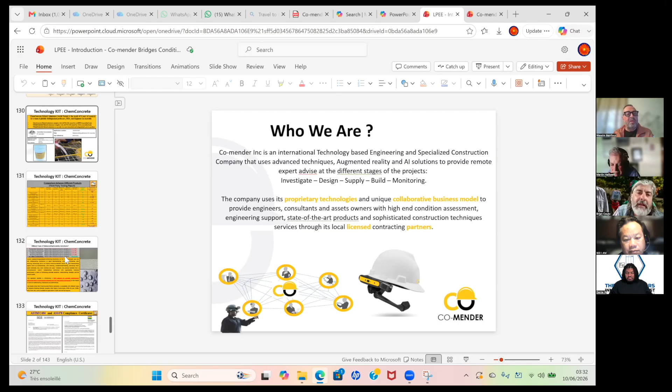You'll have a live screen and you'll see whatever they want to upload as well, correct? Exactly. So it's like having a little computer screen right there in front of you. Amazing. This is exactly the summary of it.

So the expert is sitting at his desk, seeing what the engineer is seeing and what the engineer is doing. And the engineer, when he looks here, he can see a projected view of this screen. So he can get instructions, he can get an inspection checklist, he can get everything with his hands free, because it's very critical and unsafe to use something like this at site while you're working.

It's a construction safety issue. So that's why, to be honest, the technology still has to be enhanced. It's not designed perfectly for the construction site. Now what we are trying to do is develop our own solution for construction.

Till now, we are still using solutions and technologies developed for other industries, but we are working to make this more construction friendly, to implement our solution the right way. You want to make it more rugged, so it could take dust, water, a fall. Right now it's sensitive, but it's more like it's good for inspection. Now it's good for going to site, inspecting an element, taking photos, explaining to the expert, putting notes on the photo, exchanging with the expert. It's a good option.

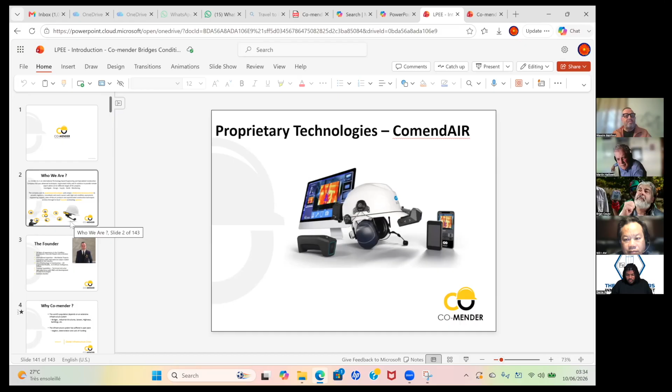Yeah, we have— for example, my boss, he's running 6 companies and 400 employees, and he likes to have the final say for everything. So he's got to drive from Mississauga to Niagara Falls to okay stuff sometimes. He's got to actually go there, see it, explain what he wants, because he's still old school. If he had something like this, he could tell the foreman, 'Hey, put on the video camera for a second, let me see what's going on.' Then he could work at the same time with his hands and fix, say, a plumbing problem or a wiring issue.

A wiring issue would be really good. If an actual electrician is looking at something, he can tell you right away, 'Hey, turn this off or turn that switch off,' or something, right? So, Brian, it's perfect for maintenance, exactly the way you describe. It's an excellent tool for maintenance, for example, equipment like HVAC in the building, problems with the electrical system.

But for concrete construction, we still have to do some development to better accommodate our requirements. Yes, 100%. Make something a little more rugged, maybe a cheaper model, something more cost effective that we could use and send around, you could have multiple in a company. Yes, they would all work on a network.

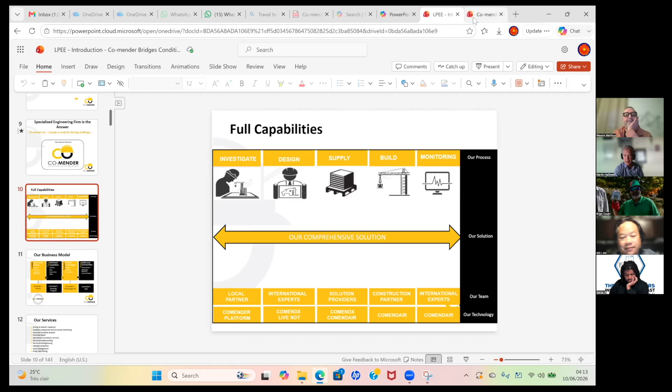Now, the shotcrete mix in Toronto, I think incorrectly, is 450 kilograms per cubic meter of cement, and I think you can drop that to probably less than maybe 350 with ChemConcrete. What do you think, we should try to figure that out. I think we've used 350 before in certain places, and then upped the slag and the fly ash in the mixes. So that mix design could be with ChemConcrete now. And that mix would be valuable, Wassim, to even work on for your projects, in terms of if we could come up with a mix now with William.

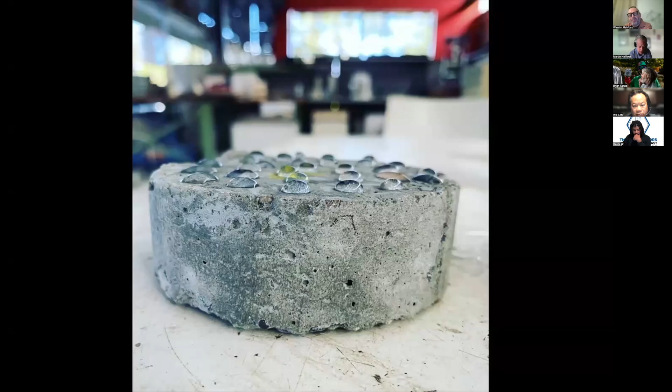This is your detail, I'll let you talk. I did send a couple of pictures to Dante too, but I only have the one picture of the beading. Okay, well show that, for the purposes of the audience we might as well show that. I also sent you, I thought maybe I haven't pressed send yet. I sent you a FEH2O lock detail with anchors. Can you see what I'm showing? There's the beading, you've seen this picture before, Wassim. So this is Sam's picture, I think, we talked about it on my podcast.

So for the benefit of anybody who watches this, this is ChemConcrete and the unique properties that make it dense. I don't see it, I don't see it, I don't know if the others are seeing it but I don't see it. Oh interesting, you don't, I have to stop sharing, I think I have to stop sharing. Oh yes, myself, yes okay, yes so now I see. So you see that, okay.

So then back to Wassim. Thanks, Dante. Okay, so I'm going to share with you guys again a little bit more about what we are trying to achieve with our waterproofing solution. With shotcrete? Yes, including shotcrete, I mean this is what we used to do.

Normally in the Middle East, they pour blinding concrete, install the membrane, a protection layer, and then another concrete layer of protection, 4 centimeters or 5 centimeters of protection. They have protection board on top of the membrane. This is for the horizontal part below the raft foundation.

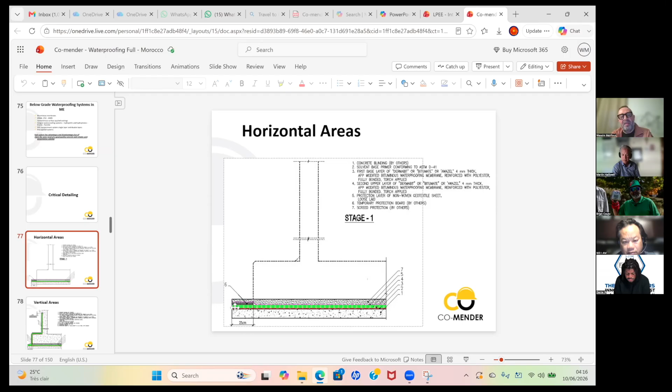And then what they do, they remove this part, they break this concrete, the 5 centimeter here, and they take overlap from the membrane, and they go up with the membrane like this to fix it above the ground level by 15 centimeter with a mechanical fixation on top.

How thick is the membrane? Membrane here, for example, this system, this is a detail. Certainly all the membranes have the same detail, but this one specifically was for double layer of bituminous membrane, 4 millimeter and 4 millimeter, so 8 millimeter plus protection board of another 2.5 millimeter. So bituminous, you mean liquid? No, not liquid, roll. It's torch applied. Okay, so this is only an example of the way we are installing it.

The envelope is created around the building. This membrane can be PVC, can be EPDM, can be any type of membrane. But this is only to show you the details, how we are installing the membrane and how we are creating an envelope around the basement if the basement is completely in the water. So it has to be like a full tanking system, enveloping everything horizontal, vertical, and going above the soil level by 15 centimeter with mechanical fixation to prevent water infiltrating between the membrane and the concrete.

But is that a dewatered condition when you put the membrane? Yes. Like it's got a secant pile wall? Yes. Sometimes we have open cut or closed cut. When we have open cut, we have access to work from outside. When we don't have open cut, we have secant pile, or we have a blind-sided waterproofing membrane. We install the membrane to the wall, and then we pour the concrete against the membrane.

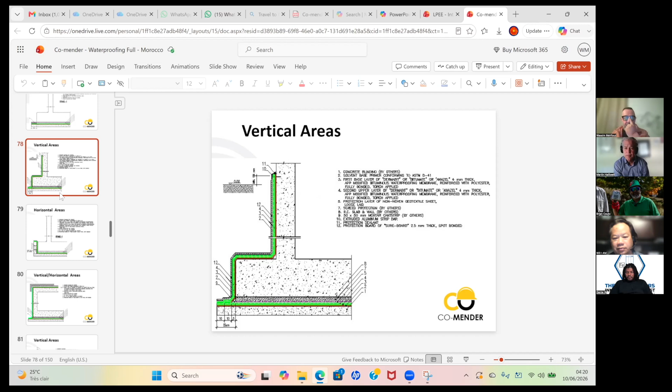So these are some details, guys, for the waterproofing, how they install the waterproofing. So they are kind of creating a full envelope.

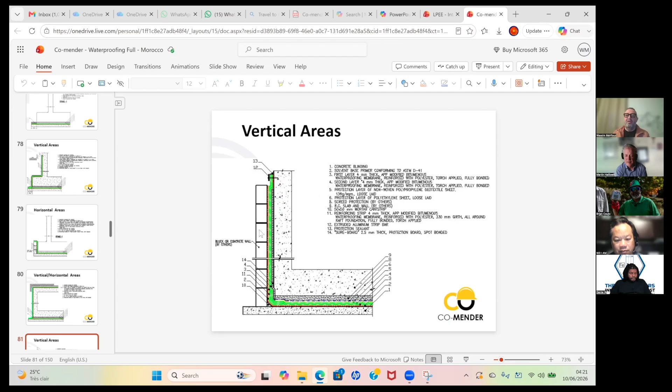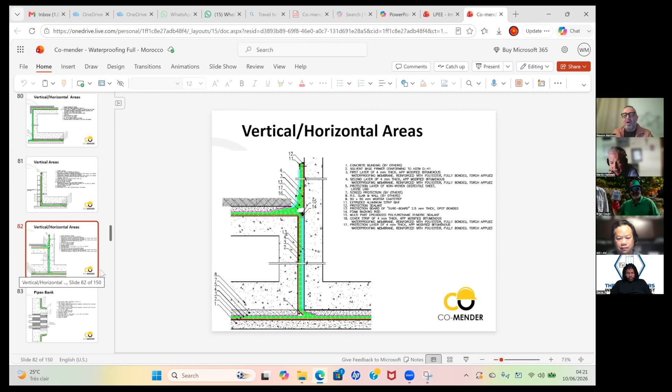This is what we say when we say blind-sided, Martin. Sometimes there is no secant pile, for example there is only a block wall, and they pour the concrete against the block wall only if there is no need, if they don't have a pressure, for example, or soil pressure. If they're above grade, are they also doing it? Typically all of these are below grade. All these are below grade, but not always high water table.

Sometimes it's only 2 meters, for example. Sometimes it's 4 meters. Sometimes it's a 10-meter water table, depending on the job site.

Relatively flat grade, would you say? Yes. Saudi Arabia is a desert, does it have mounds or hills 10 feet higher? Do people build in the dry there? Is there any dry area to build? Yes, sometimes, for example, in the Riyadh area it's a dry area, but they have some gaps in the soil filled with rainwater, and when they excavate they find underground perched water. Perched, yes, exactly, something like this. But in some locations it's 100% dry, yes.

But they do the waterproofing in this case against rainwater, because when it rains, it rains cats and dogs - a lot of water. It rains maybe 2 times a year, but it's really heavy rain, enough to test the waterproofing.

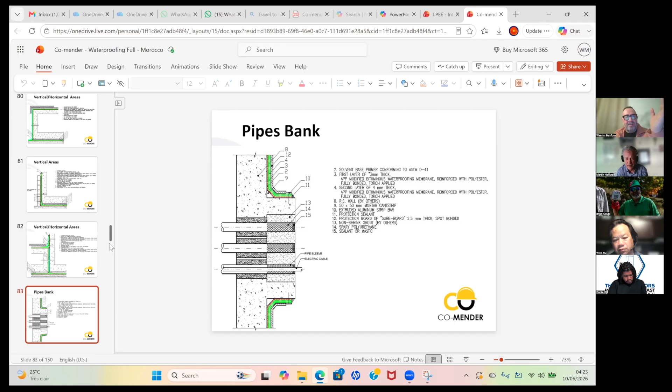Exactly, if you'd like our support on that, CH Shotcrete would definitely help out, William. In terms of William, would you wear the helmet? I wouldn't wear the helmet. But I might wear the helmet. Maybe we could both have helmets. Could I have a helmet too? I think Brian, you want a helmet too, right? Brian, where are you? Brian, you're quiet.

Imagine also this detail, Martin. Sometimes you build the raft on top of piles, a lot of piles, right? And then it's like a sieve. You have to do a treatment around every single pile with the membrane, so the membrane becomes like a sieve. These piles are probably 3 or 4 meters away from each other, and imagine an area of 5,000 square meters with all these piles and treatments. Do you think the membrane will keep water out in this location? For sure not. But imagine if you have ChemConcrete inside the concrete here - not necessarily full thickness - even treated with ChemConcrete only like this, then water will not go through.

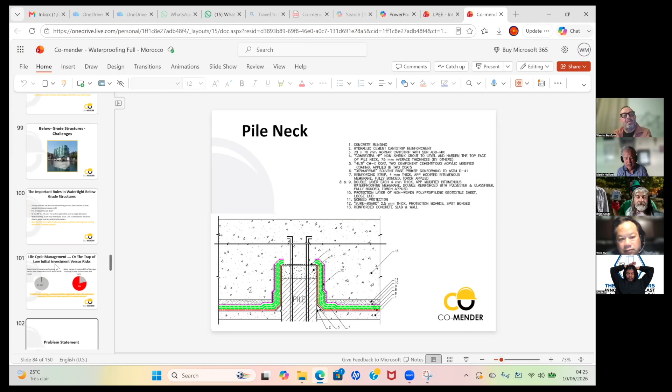But practically, with Wassim, you would spec the whole thing with ChemConcrete, right? There would be no point saying 'let's use the cheaper concrete' - it's not even necessarily more money. So yes, I think the direction we're headed is trying to get help from William and you to improve the leakage implications, right?

So this job was in Jeddah, Lamar Tower, one of the iconic buildings in the city. Look at the condition of the basement after they shut down the dewatering system - the whole basement was full of water infiltration. They kept treating this basement for almost 5 years after completion to stop the water, and they failed. A lot of issues now with durability, a lot of issues with corrosion. Now they are installing a full impressed cathodic protection system for the basement to protect the reinforcing bars. This is another job.

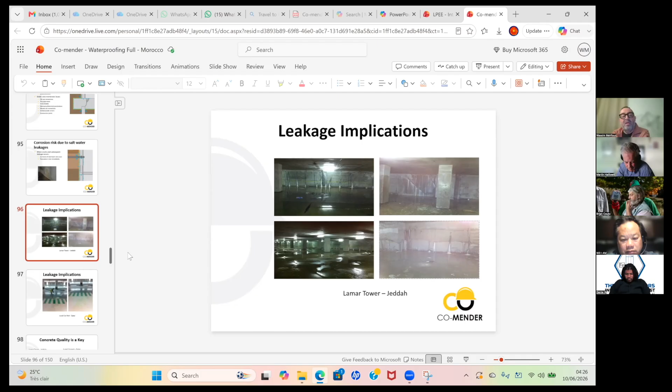Same membrane, same failure, but depending on the concrete quality - you see the concrete quality here, and here. Certainly the concrete quality is different, that's why you see less water. But in general, if you repair the concrete - what I'm trying to say with this presentation is that the membrane is only protection. If you want a watertight structure, you have to have watertight concrete. Correct. And to achieve this watertight concrete, you have to follow a lot of engineered solutions. I don't want to get into it now, but I can show you some photos.

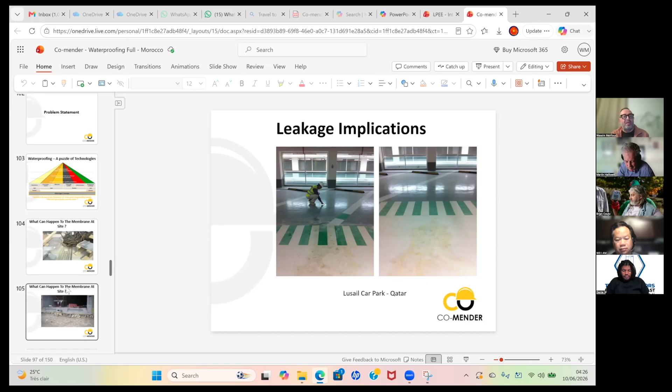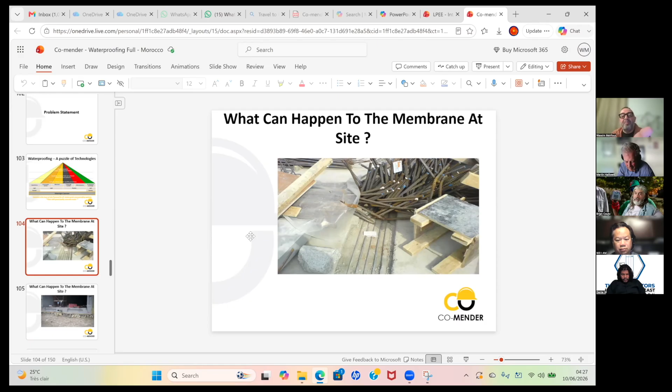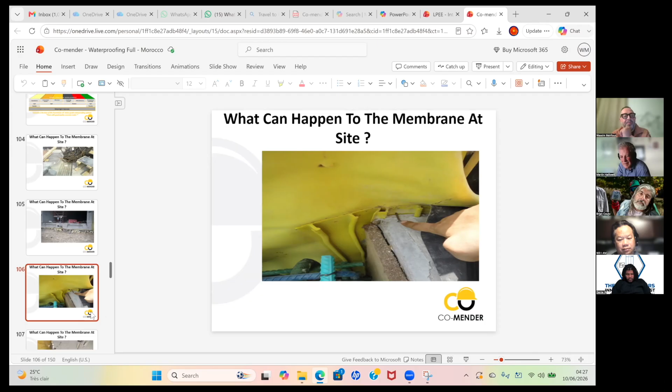We'll talk about it later, but I can show you some photos of what can happen at the job site. If you have your membrane, this can happen, right? This can happen - excavation can happen. Maybe they cut the membrane without anybody paying attention. Yeah, I've seen that, this can happen. You see the nail here? Somebody wants to install something, so he nailed into the PVC membrane. Segregation like this can happen.

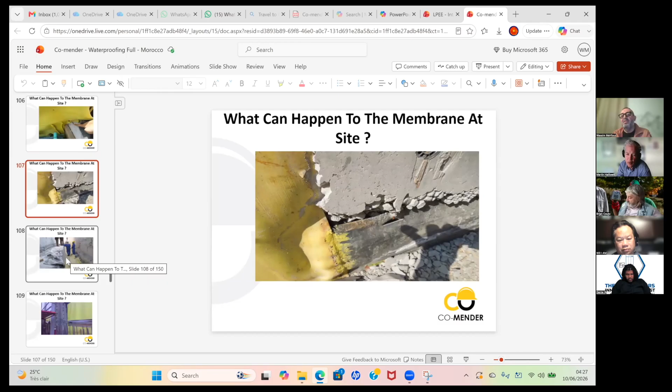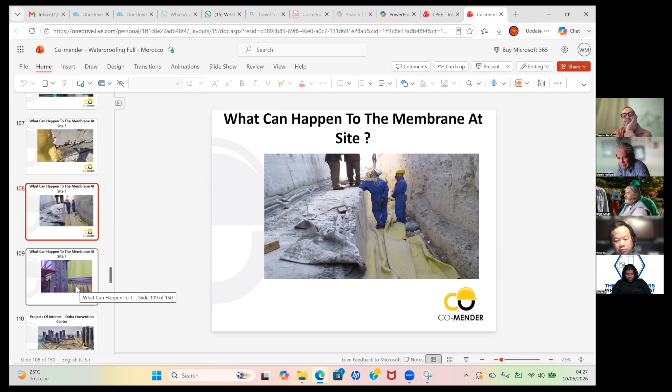That's why QA in construction is so important - people should be non-working, just watching. Exactly, but that costs money. Well, that cost of mistakes costs money too, to have warranty. So somebody here, for example, cut the membrane to install his reinforcing bar to extend it.

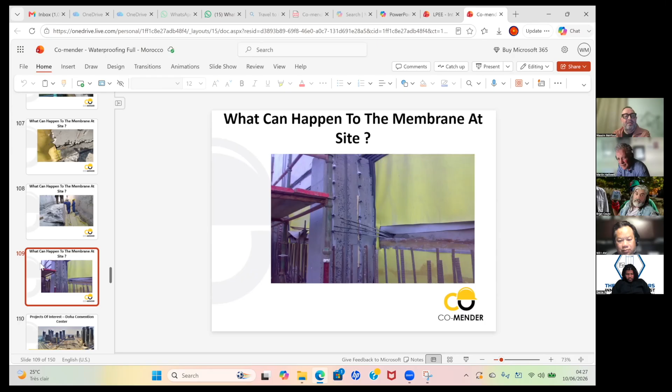This is the type of projects we normally used to do. Imagine how many piles here in this area. All of this is treated with the same detail that I showed you before.

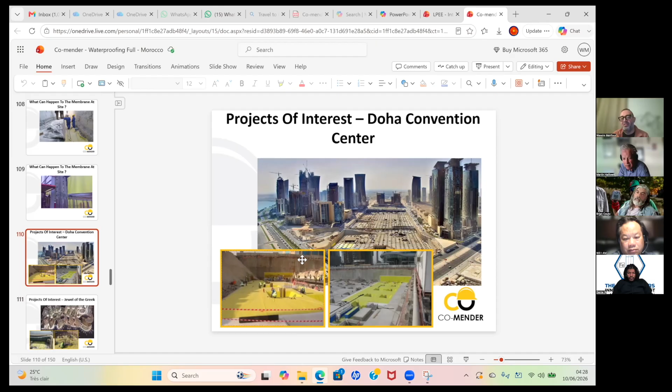Yeah, that's a lot of membrane. A lot of membrane, a lot of detailing, and for sure the membrane becomes like a sieve. It's not a continuous, really envelope around. You cannot trust the membrane alone. Correct, you have to have watertight concrete to have a watertight structure. This is the conclusion.

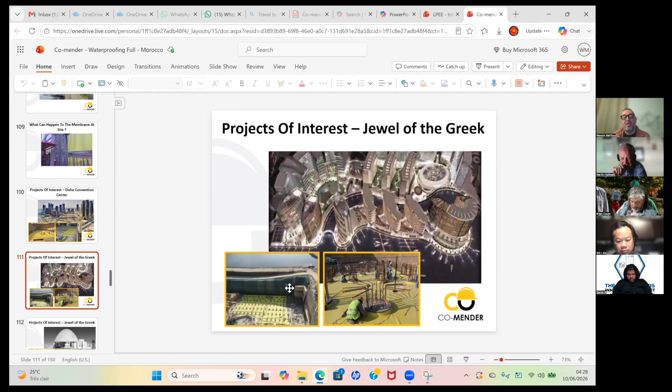Huge projects like this, I remember this was 15 meters below water surface, Martin. This is the Jewel of the Greek, one of the biggest projects in Dubai. Is that secant wall or slurry wall? That was slurry wall, yeah.

This is the Louvre Museum in Abu Dhabi. Most iconic projects, they were done and waterproofed with membrane, and all of them are complete failures. I was personally involved.

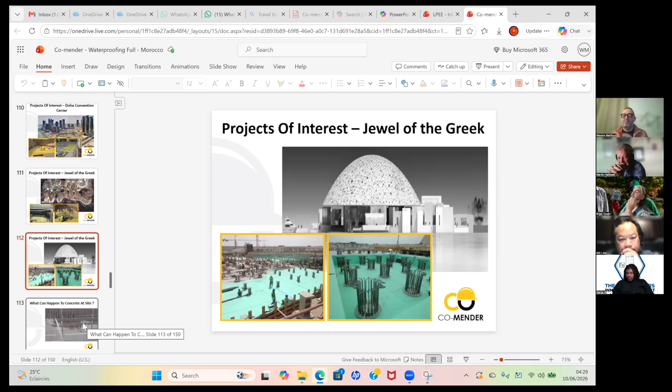Is that rebar, steel rebar? Yes, steel rebars for the piles. Why don't you use glass bar instead? They started the manufacturing - I don't know if you know the company Mateen Bar from Netherlands. Mateen Bar started its own manufacturing facility with my previous company, Kabani Construction Group, to manufacture glass fiber rebars in the Middle East. Yeah, that's new technology there. It's new technology, yes, they're stronger bars, right? They're stronger, lighter, non-corrosive. Stuff like this can happen outside.

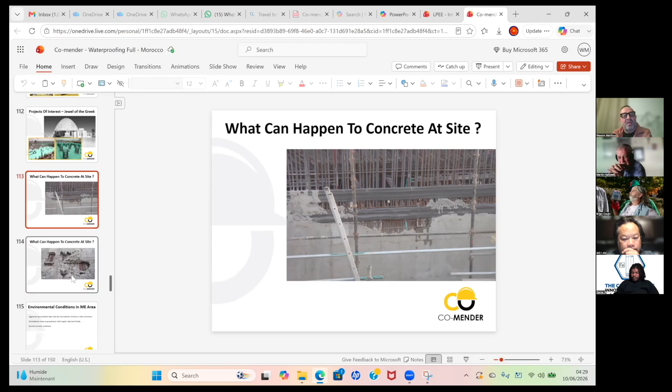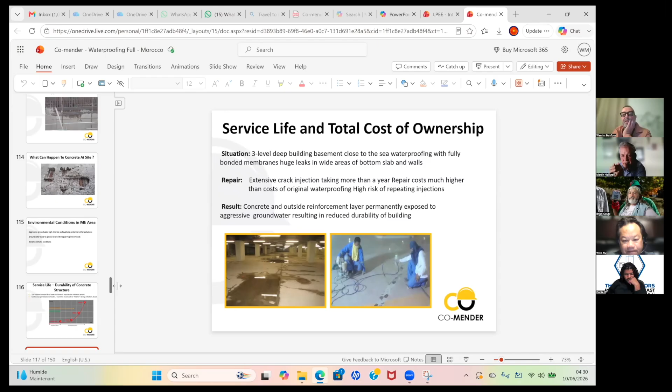Wassim, are you sharing screen right now? I sent you an email. I tried to send it to Dante earlier. Let me open my email again, please. Yes, I'm gonna... so this is... go ahead. I'm gonna stop sharing and share again. Sorry, did you see the detail? I saw it come up briefly. Yeah, sorry, one second, I'm gonna reopen again.